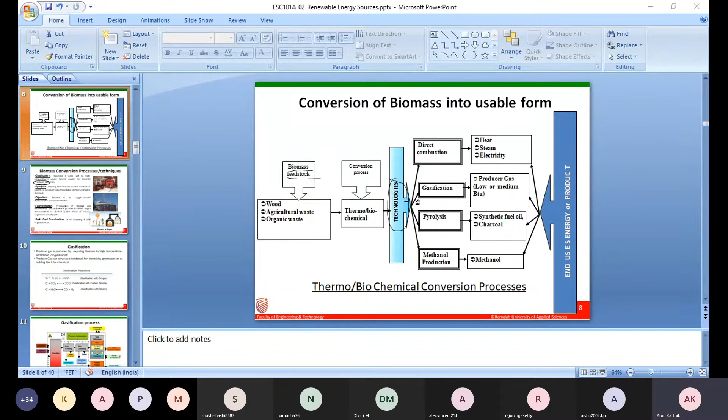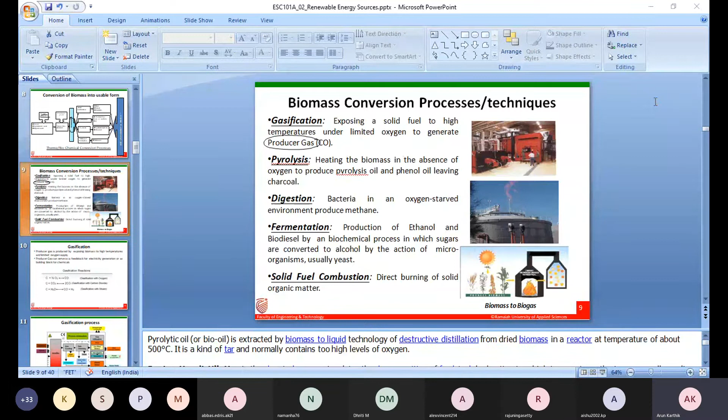Now, are you able to see? Yes, sir. Was it the same with everybody? Were you not able to see? Hello? Yes, sir, we were not able to see the slides. Okay, let me try to set it right.

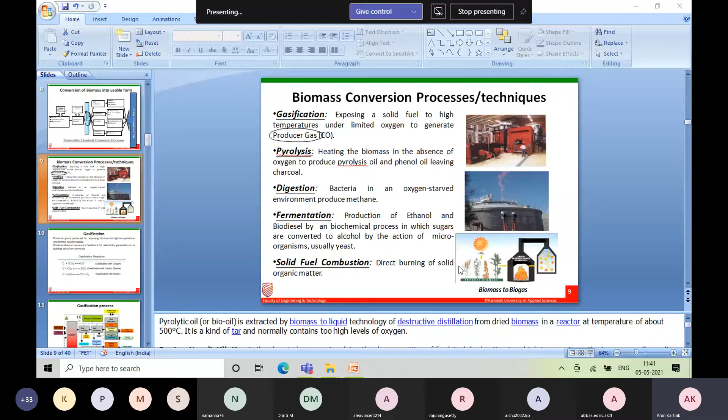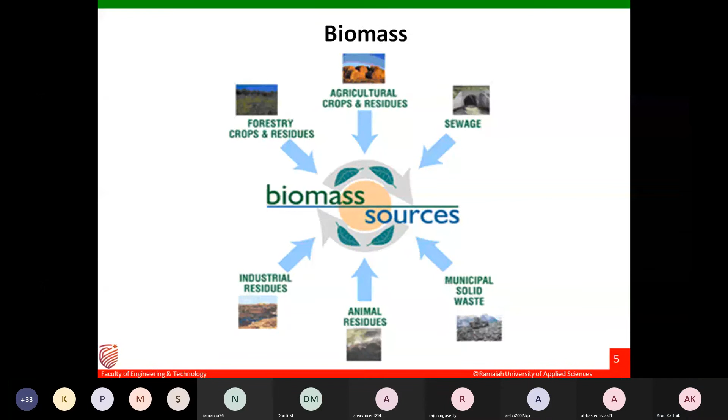So this was the slide that you were able to see. Then I was telling how traditionally the biomass has been utilized.

That is the direct burning of wood or cow dung, which is dried up and used for agriculture as a fertilizer, or it is also used for cooking.

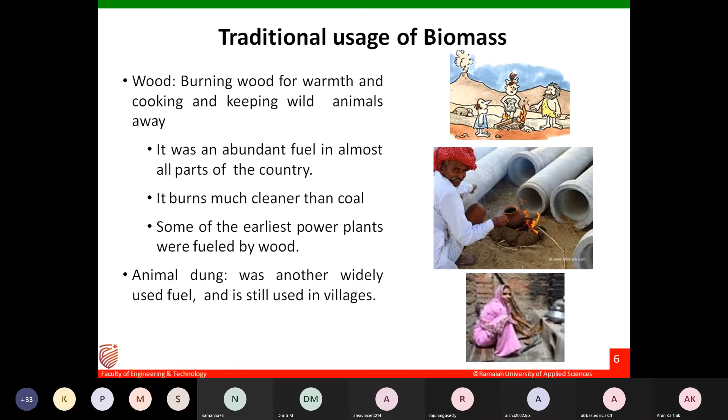And the pollution is also comparatively less when compared to fossil fuels. So this is how the animal dung is dried up and stacked up and utilized for burning, or the dried or cut wood is utilized for cooking.

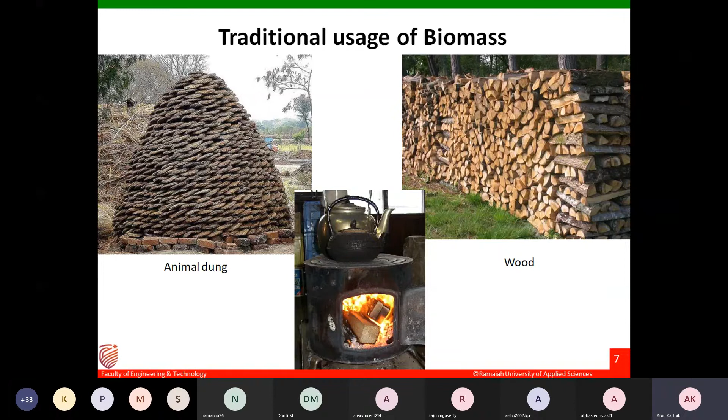So, I was telling about the various conversion techniques: direct combustion, gasification, pyrolysis, and methanol production.

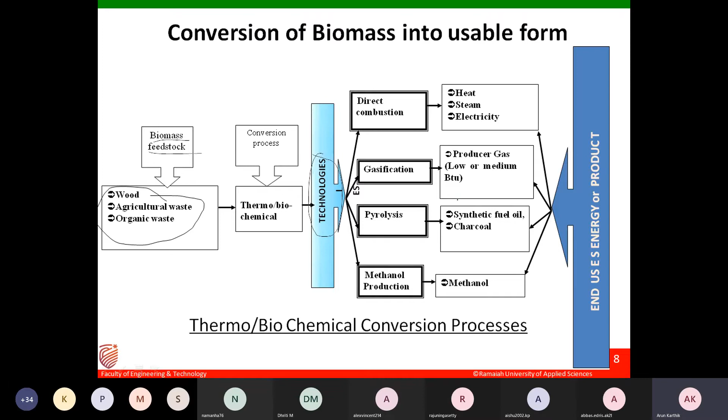These are some of the thermo or biochemical technologies which utilize wood, agricultural waste, and organic waste to convert them into suitable materials so that we get useful gases like producer gas, syngas, methanol, ethanol, etc. Various technologies are applied to get these gases, which can be used to run a generator, run a turbine connected to a generator to get electricity, heat material, produce steam, or run a boiler.

So first, what is gasification? Gasification is subjecting the fuel to very high temperatures with a limited supply of oxygen to generate producer gas. The solid fuel is burnt at very high temperatures to produce producer gas, which is nothing but carbon monoxide.

Then we have pyrolysis: heating the biomass in the absence of oxygen to produce pyrolysis oil and phenol oil. The residue left is charcoal, which can again be utilized for some useful process, like generating electricity or for burning.

Next technique is digestion. Digestion means there is microbial activity. If you think of digestion in the human body, it also involves microbial activity; otherwise digestion is not possible. So as soon as we hear the word digestion, we understand there is microbial activity in it. Digestion involves bacteria which work in an oxygen-starved environment to produce methane. The methane is the gas produced by digestion.

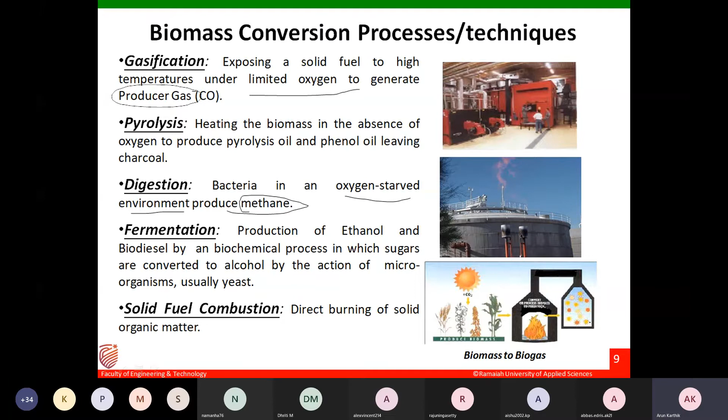In the gasification process, we have three techniques. We utilize carbon dioxide, steam, or oxygen along with the biomass material to produce carbon monoxide. Carbon monoxide is the gas also called producer gas, which is produced by exposing biomass to very high temperatures with limited oxygen supply.

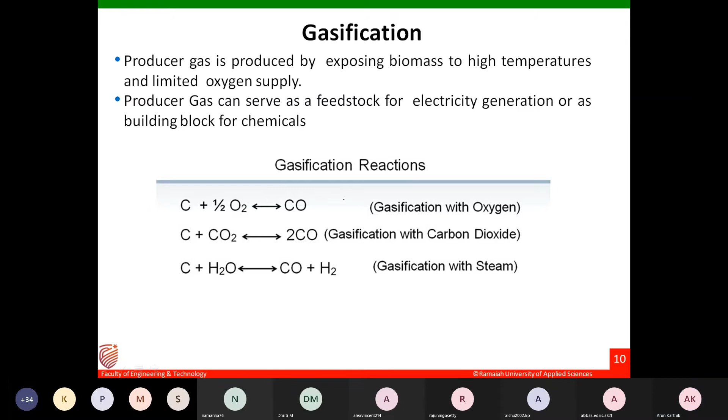In this gasifier, we subject the biomass to a gasification process, heating it to a very high temperature with a limited supply of oxygen, which helps produce carbon monoxide, or producer gas. This gas is then cooled. As it is cooled, you get some condensates, that is, remaining material. This gas is used after cleaning, and when you clean it, you get wastewater and condensates.

This gas is used to fire the boilers. From the boilers, you get heat energy, which is used for district heating, where heat energy is required to fight cold, etc.

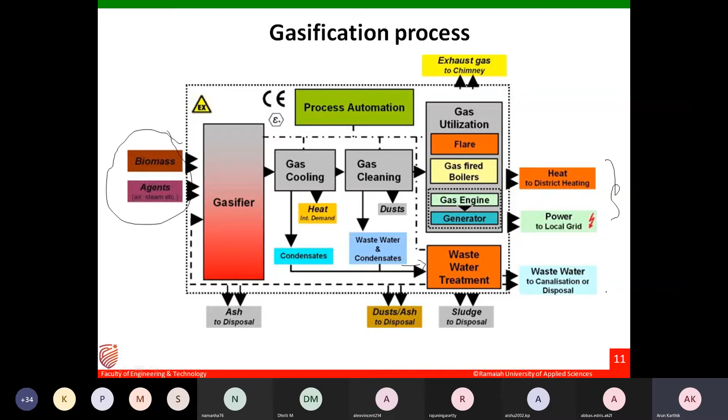So coming to the first type of gasifier, called the updraft gasifier, I'm going to tell you about the updraft gasifier. Here updraft means you're supplying the biomass from the top region. You can see that the biomass is supplied from the top. Downdraft gasifier means the biomass is supplied from the downward side.

So here the biomass is supplied from the upside, and it is subjected to some drying. It is heated to about 400 degrees centigrade and dried. Then, with no supply of oxygen and at high temperature, it is subjected to pyrolysis.

Then it is subjected to a reduction process, meaning absorption of some material at 950 degrees centigrade. Then it is burnt, that is at 1300 degrees centigrade it is burnt to give out gases. Here we are supplying air for the combustion process so that it helps in combustion. Finally, ash is remaining.

We will see what this updraft gasifier is using a video, so that you understand now itself what the updraft gasifier is.

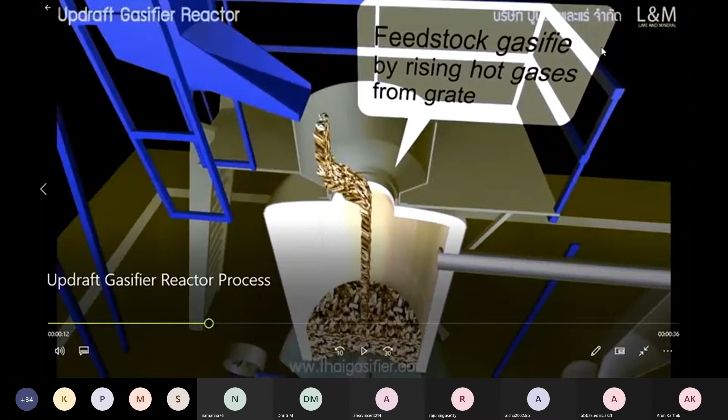Let me show the updraft gasifier. So this will tell you how the gasifier works.

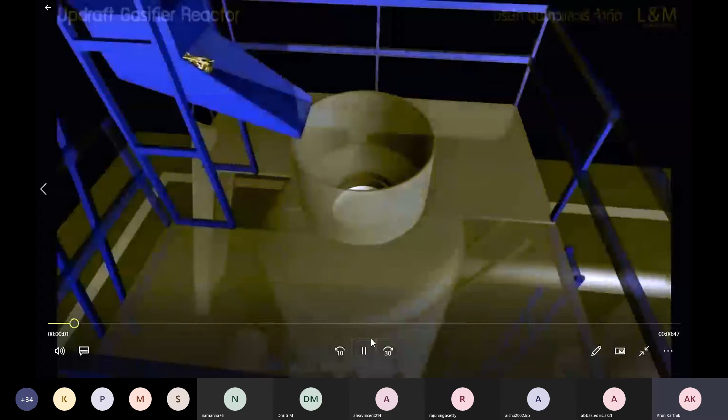Guys, are you able to see the video along with the volume? Yes, sir. Yes, sir. Okay. Yes, sir. Yes, sir.

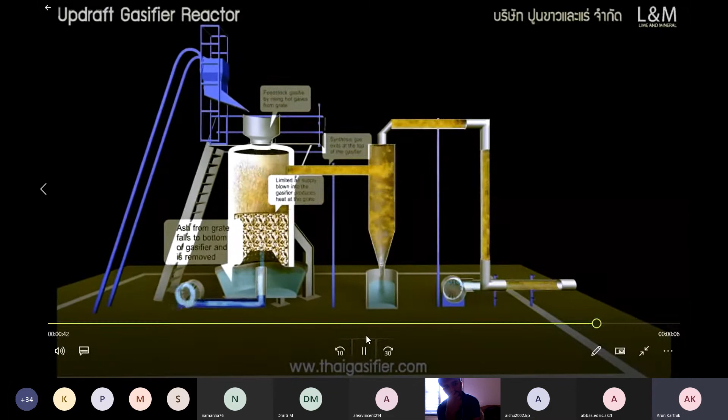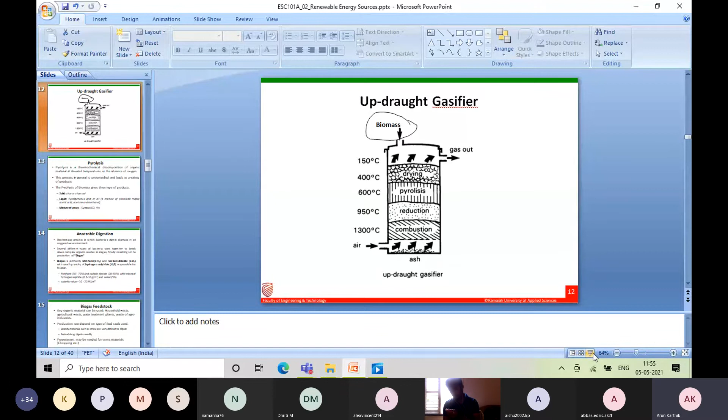Hope it is clear, I hope you have followed each and every step. Finally, the product that we are getting is the gas, which can be used for generation of electricity or some heating purpose.

Did you get it, guys? No, sir.

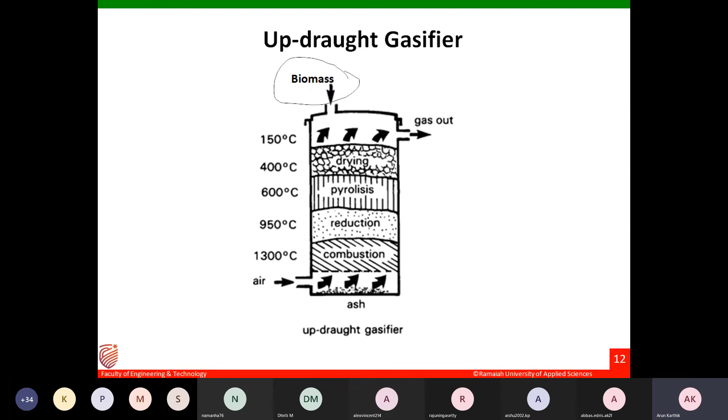Next technique is the pyrolysis. Is the updraft gasifier clear to you all, guys?

Hello? Little bit, sir. Okay, okay.

Next is the pyrolysis. It is a technique where there is no supply of oxygen, and it is subjected to decomposition of organic material at a very high temperature. This technique in general is uncontrolled, meaning it leads to a variety of products, not just one product.

As a solid material, you have charcoal. As a liquid material, you have pyroligneous oil, which is a mixture of chemicals like acetone, methanol, acetic acid. Then we get syngas, which is a combination of carbon monoxide and hydrogen. So from this pyrolysis, we get three types of products: in the solid region, liquid region, and gaseous region.

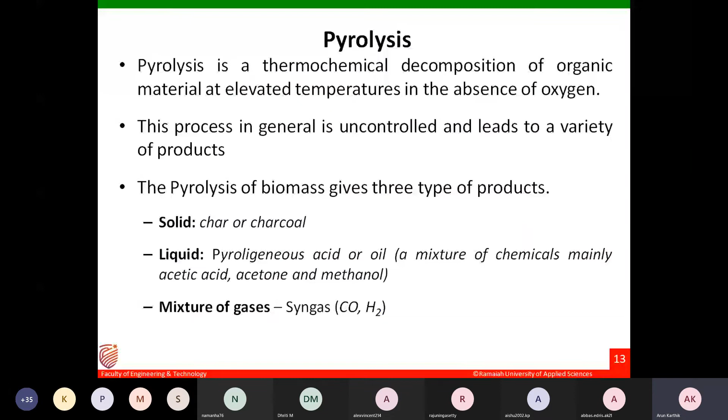The next technique is anaerobic digestion. Anaerobic digestion means there is no supply of air. Just by the word anaerobic, it means there is no air, but there is microbial activity. Digestion involves microbial activity, where we utilize bacteria to digest the biomass in an oxygen-free environment to produce a gas called biogas, where the bacteria work together to break the biomass.

They break down the complex biomass, which might be wastes, plant material, cow dung, or wastes of animals, etc., which are subjected to some bacterial activity, resulting in the production of a gas called biogas. The biogas mainly consists of methane, carbon dioxide, and hydrogen sulfide.

So 50 to 75% is methane, and 20 to 40% is carbon dioxide, and hydrogen sulfide is 0.1 to 10 gram per meter cube, and water about 5%. So these are the products available due to anaerobic digestion, and the calorific value of this anaerobic digestion is 16 to 20 megajoules per meter cube.

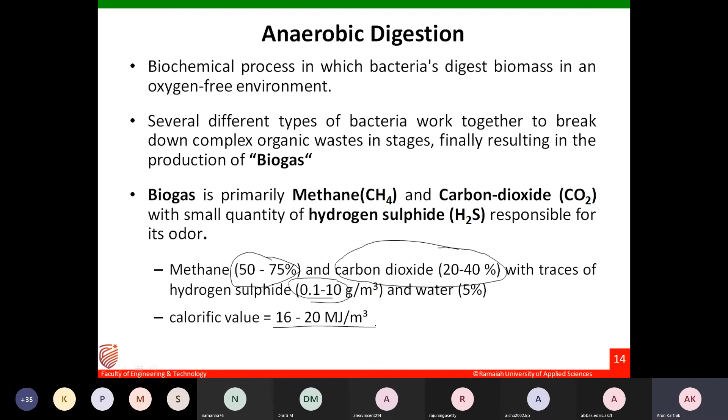Next technique, next slide is talking about biogas feedstock. What is the feedstock for biogas? Meaning, to get biogas, what is fed to produce it? Household waste, animal waste, agricultural waste, waste from water treatment plants, and waste from agriculture or agro-industries all constitute the feedstock in the production of biogas. The production rate of biogas depends on the type of feedstock used.

Woody materials or straw kind of materials are very difficult to digest. So they can be subjected to some pre-treatment, that is cutting them using a machine before supplying it as biogas feedstock. Animal dung is easily and readily digested, but in the case of woody material, it needs to be chopped.

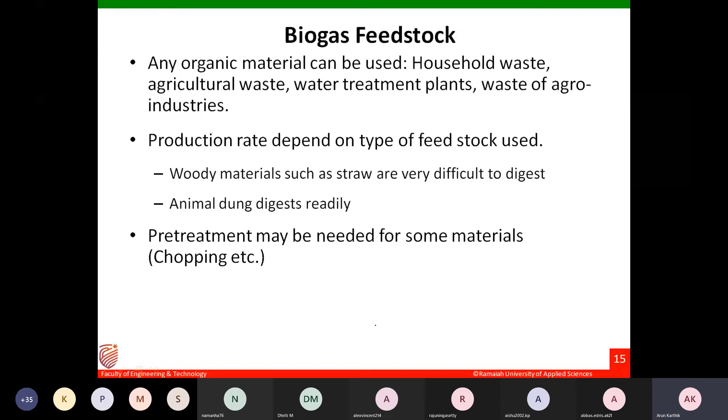So what happens in this biogas digester? Here we have, let's say, cow dung. This is the floating dome biogas digester. In the mixing pit, we supply the cow dung along with water. It is mixed properly and supplied here, becoming slurry. Here we have the partition wall. After several days, through this pipe you get the gas, which can be utilized for electricity generation, heating, or other useful purposes. The waste material that remains is sent out using this outlet.

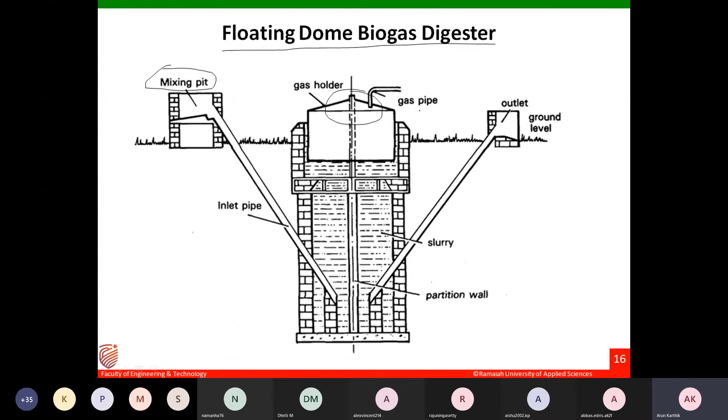So this is an anaerobic reaction, carried out for several days at suitable temperatures, to get the biogas, which is a combustible gas. This floating dome biogas digester is called so because it has a dome kind of shape—if you look here, this dome shape is what gives it its name. The digested matter is further used as manure.

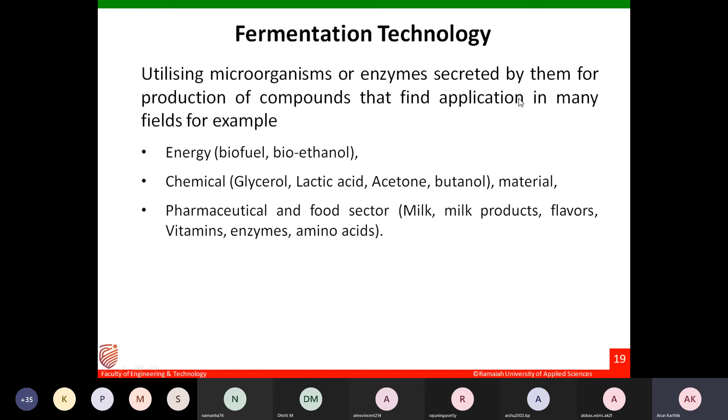So I was telling about the floating dome biogas digester.

Next, I want to play a video on thermochemical conversion of biomass to biofuels, and end the session for today. I observe that this kind of theoretical notes is not enough; the videos might be good enough for your understanding. So hence I am playing this video now. Please observe it.

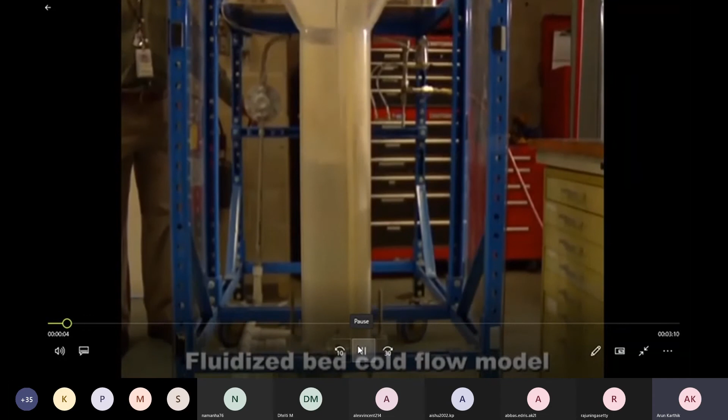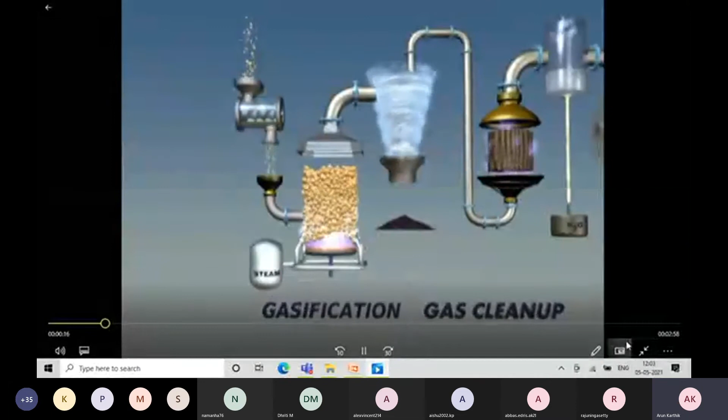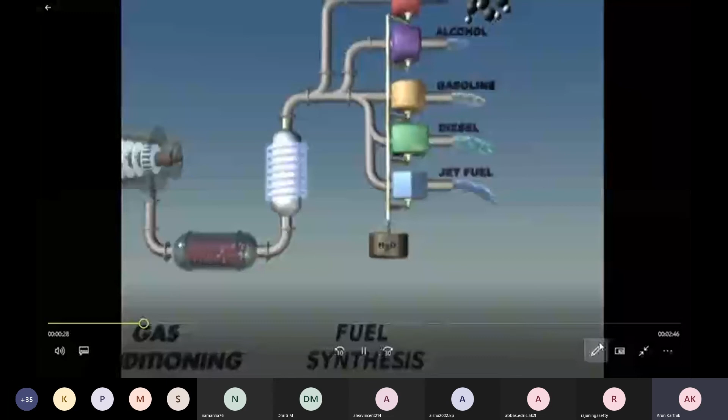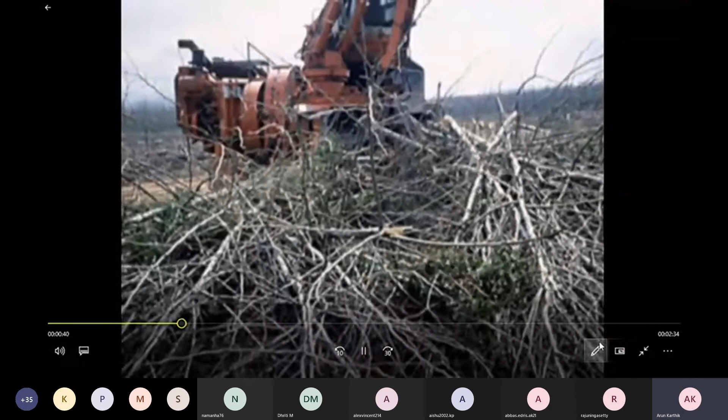The thermochemical conversion process uses heat to break down biomass into intermediates, such as gas or bio-oil, that can be upgraded into fuel and other products. One type of thermochemical conversion process is gasification, a method that uses heat to turn biomass into a hydrogen and carbon monoxide-rich gas called synthesis gas, or syngas. This in turn is converted into liquid transportation fuels or other products. Gasification occurs at relatively high temperatures. Here's one example of a gasification conversion process. Wood material such as forest residue is a common feedstock for the gasification process. For best results, feedstock wood chips are no more than 2 inches in size and have 20% to 30% moisture content by weight, depending on the gasifier.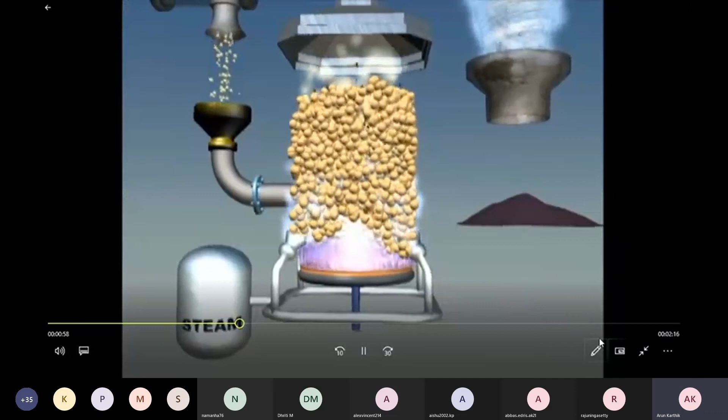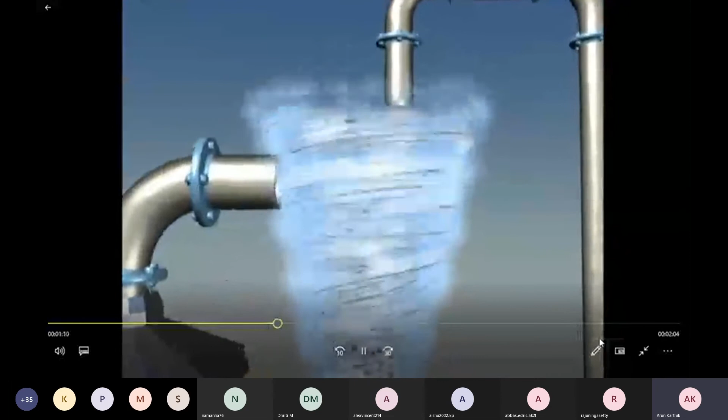In the gasifier, the biomass is broken down into vapors in a carefully controlled environment that typically contains oxygen and/or steam. The syngas produced is made up of carbon monoxide and hydrogen. Char, a solid byproduct of gasification, is typically removed using a cyclone. Cyclonic separation allows removal of particulates from a gas stream without a filter, using rotational effects in combination with gravity to collect the particles. Tars and methane are also produced; their quantity and composition depend on the gasification environment. Tars are high molecular weight organic compounds. If not removed, these tars will contaminate downstream equipment and inhibit fuel synthesis. One way to remove methane and tars is by using special catalysts to convert the compounds into additional syngas, thus eliminating the methane and tar problem while also improving the efficiency of the process.

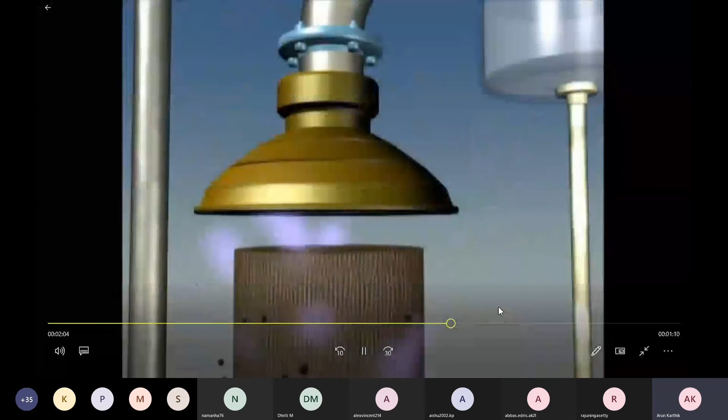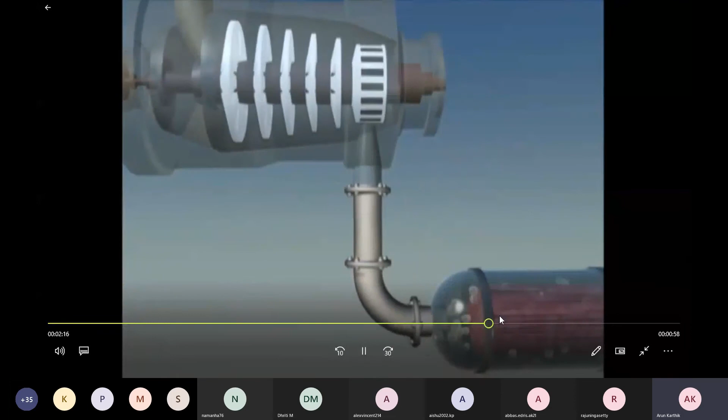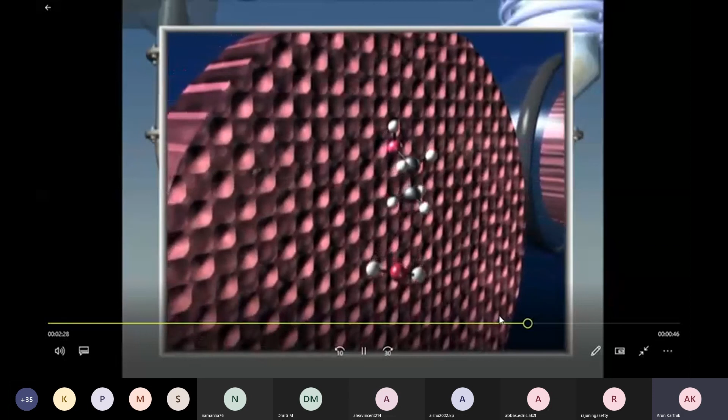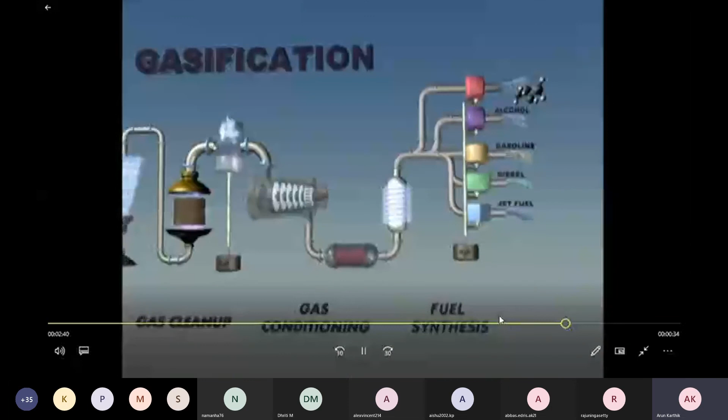Additional cleaning and conditioning steps may be required to remove other contaminants such as ammonia, sulfur, and carbon dioxide. The syngas is then conditioned to produce the desired ratio of carbon monoxide and hydrogen to achieve optimal chemical reactions in subsequent steps. The pressurized hot syngas is then passed over a catalyst to form a liquid. The catalyst is contained in a reactor, and the syngas is passed through it, where the carbon monoxide and hydrogen molecules combine to form larger molecules. These molecules are subsequently cooled, condensed, and refined into clean, renewable transportation fuels and other products. The Department of Energy has supported development of innovative technologies that result in higher yields and superior quality of biomass syngas. These efforts have also resulted in a much more thorough understanding of the gasification process. Enabled by these advancements, industry is deploying gasification technologies that will bring clean, renewable transportation fuels and other biomass-based products to the marketplace.